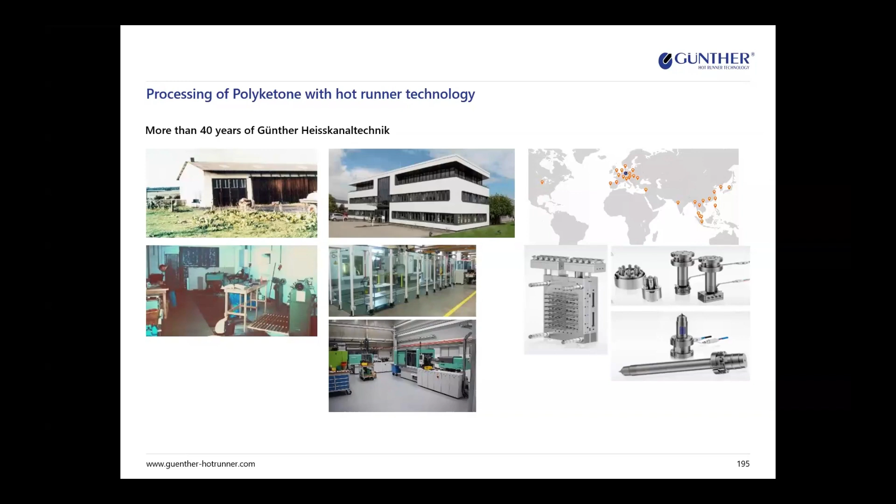As you heard or saw, the polyketone grade was launched in the market in 2015. Now you will find different kinds of grades from distributors like KD Feddersen, or compounders like Akro-Plastic, Ems Chemie, Riamaxx, or LyondellBasell. You saw also the wide range of properties and the good balance of this material.

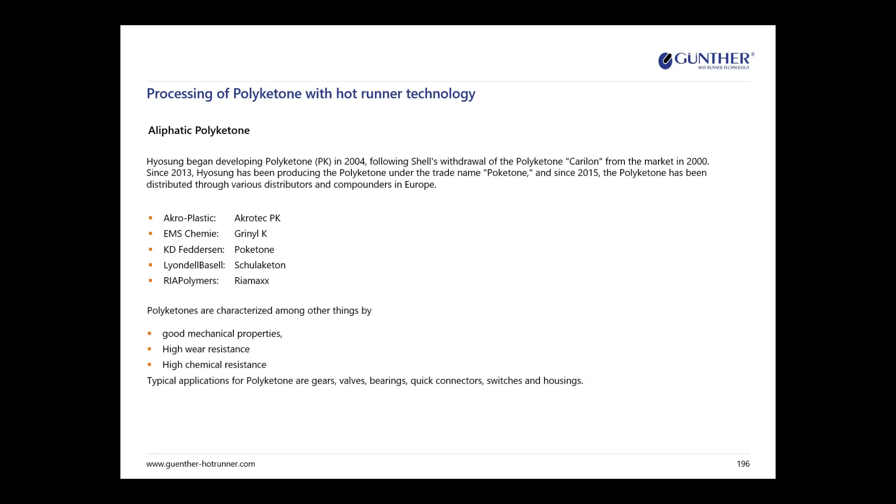For this, we see that more and more customers ask for hot runner systems to process the polyketone grades for their applications.

In the beginning, I remember in 1998 we heard of Shell's Carilon, maybe some of you remember. This was really terrible to process, and Carilon was cancelled after a few years from the market. So we wondered how it would be when Hyosung came again with a polyketone, and we were really surprised how the processing of the material would be. And of course, polyketone could be processed with hot runner systems.

It's quite a challenge, but it's a solvable task if you take care of special issues, as you can see here. The main issue is residence time and temperature. It's a very, very important issue for this material.

You can see here the maximum temperature in the hot runner should be between 240 to 260 degrees Celsius. Our tests showed that the mold temperature does not have so much influence on the possibility of cross-linking or degradation of the material. Also very important is that the injection unit and the hot runner system are really clean.

So when you start with polyketone, everything has to be cleaned so that you have a real metal-blank surface. If there are any residues of nylon or POM inside, you will never have fun with this material. So take care to have everything very, very clean.

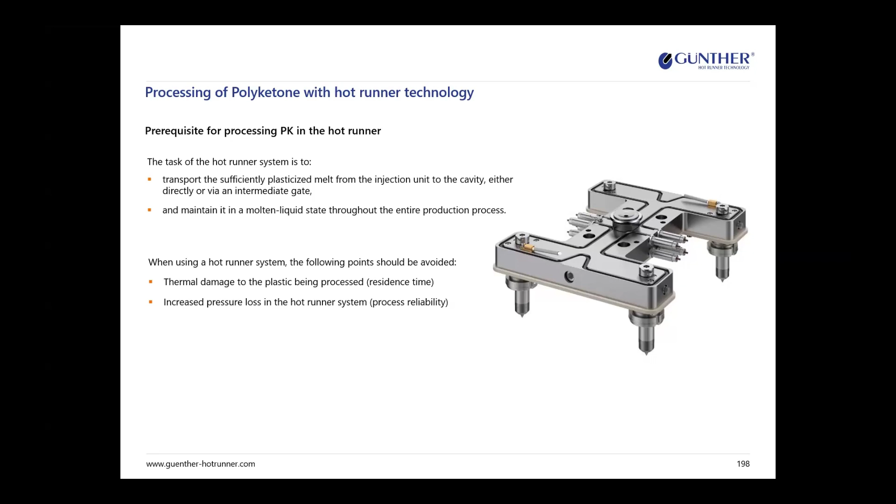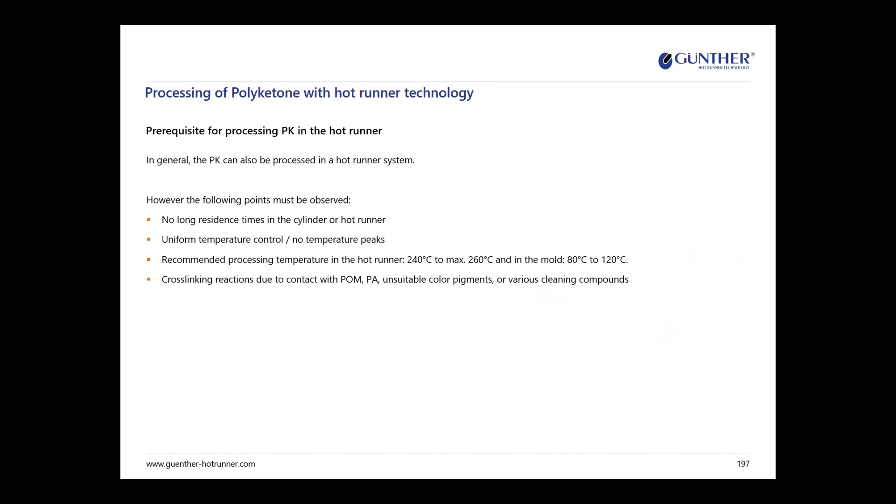One of our customers in Italy came in 2016 and asked if it's possible to process polyketone with a hot runner. With the experience from the former Carilon, we said no, not really, but send us a new material and we'll run tests. We have a laboratory with 4 injection molding machines with different kinds of test molds, so we can carry out a lot of tests with our hot runner system. If you're interested, come to us and we could carry out tests together with you with your polyketone grade to see if the process will be okay or not.

In this case, we carried out the test. You see here one of our test molds with a disc as a sample part. We use a hot runner nozzle with an open tip, and we have a special heating element inside which fulfills a very good, unique temperature profile inside the nozzle. So we have to check how it's processing the temperatures, how the filling study looks, and also what happens after process interruptions of about 5, 10, and 15 minutes.

The results showed, okay, with this polyketone grade it is possible to realize a project to process the material without big problems, but we also have to take care. Residence time more than 15 minutes is really critical due to cross-link behavior and then degradation. It's also very important to purge the barrel as well as the hot runner system with a very high viscosity polyethylene or polypropylene. Please also take care that the viscosity has to be really high, MFI approximately 1 or less at 190 degrees and 2.16 kilogram, otherwise you don't have a good purging effect in the system.

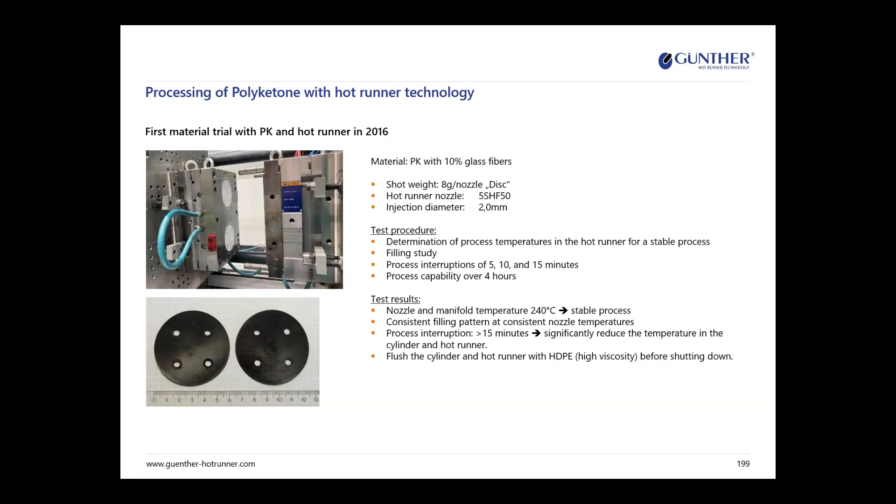This was our first hot runner system, which we realized with a polyketone in 2017. This was a PK grade with 10% glass fibers, 6 grams per nozzle, and we have a 2-drop hot runner system. You see here the nozzle tip. And this mold is always running, as far as I know, till today without any problems.

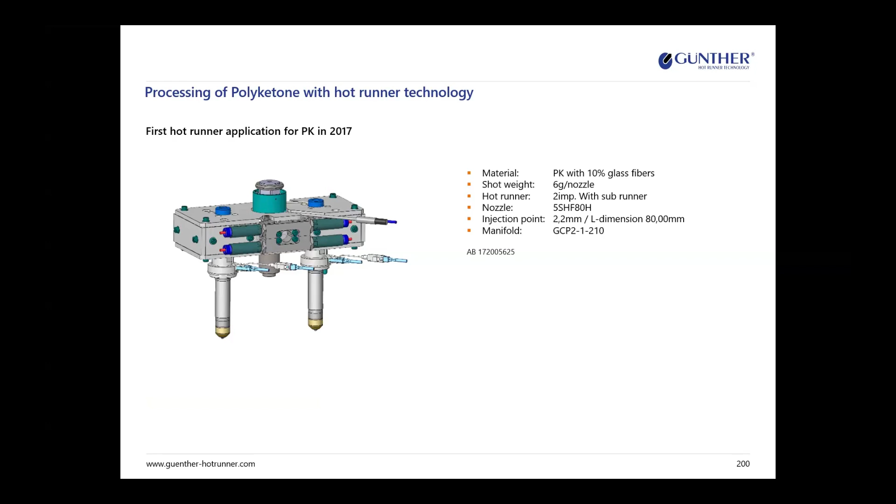What is now special with our hot runner system? As you can see in this picture, we have the hot runner nozzle here, and we have the heating element. This is the so-called blue flow heater, or thick film heater. It's developed by ourselves and we produce the heater also in our house.

Around this heating element there's a material tube. We have here a two-part shaft. This area of the shaft is made of steel. This part here is made of a special titanium alloy with very low heat conductivity. Between the shaft and heating element there is an air gap. You know, air has very good heat insulation behavior. And the contact between the nozzle and the mold is far away from the hot area of the tip.

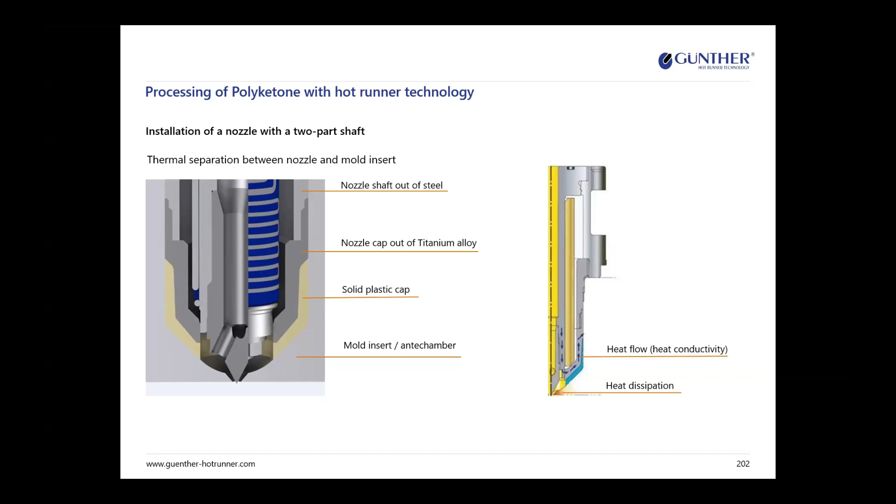This also influences the temperature profile inside the nozzle, and this is one of the most important issues. On the right-hand side, you see a nozzle from one of our competitors. We measured the temperature inside the nozzle. We filled the nozzle with plastic, assembled it in a mold, heated the nozzle up to 300 degrees, mold at 30 degrees, and then measured with a separate thermocouple into the manifold and into the nozzle the temperature inside the plastic. We see this temperature situation inside the nozzle. On the controller you have 300 degrees, but maybe you can imagine what actually happened in the hot runner itself. Here you see we have 50 degrees more. You could imagine with polyketone, such a temperature situation is not recommendable. Maybe with polypropylene it could work, yes, but not with polyketone.

With our nozzle and our friction heating element, we have such a temperature profile. We use the same measurement system, and you see here we are only approximately 10 to 15 degrees more. In this area we have more power to bring enough heat into the area of the tip.

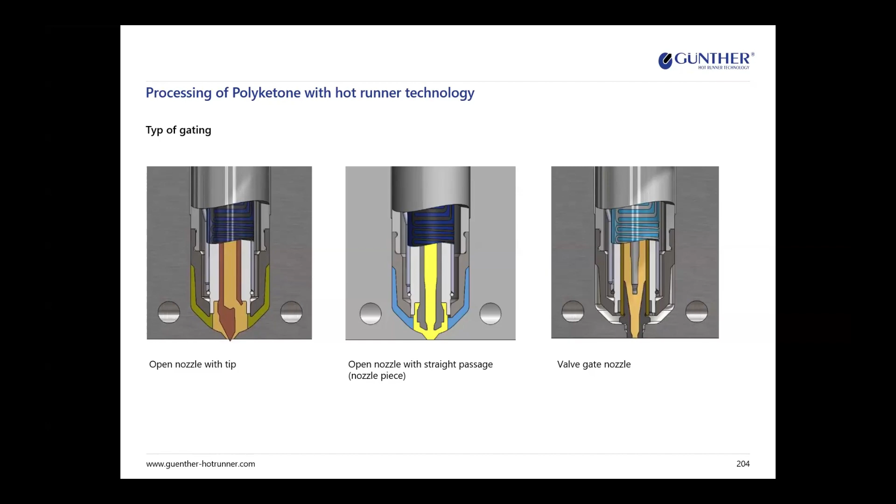It is also important to know regarding the processing of polyketone, as I mentioned before, temperature distribution is very important for polyketone.

We have checked also the manifold. You see here a manifold with 16 nozzles, and before we made a heat simulation, and you can see on the right-hand side the difference between maximum and minimum temperature of the manifold is 3 Kelvin.

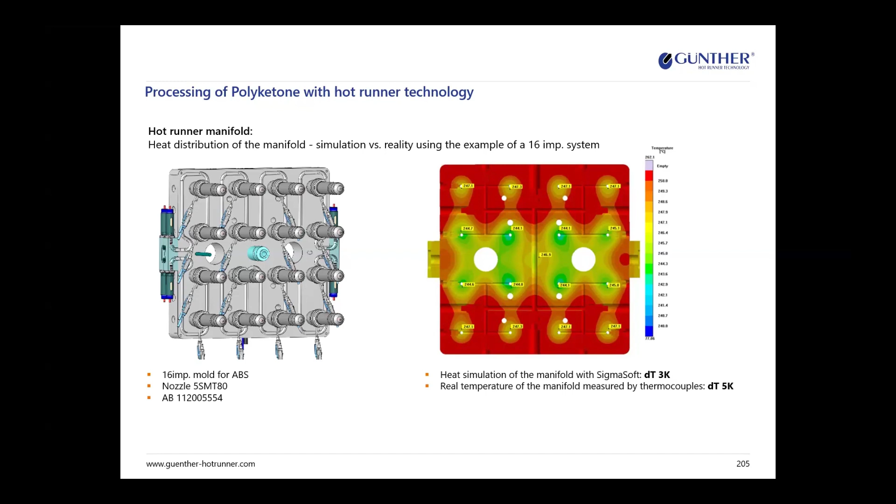We produced this manifold, we added a lot of thermocouples around the manifold to measure the temperature during the process, and the difference in reality is approximately 5 Kelvin. So we have here also a very good heat distribution, a very uniform temperature profile inside the manifold, which is also important for polyketone processing.

In our house, we have a database where we add applications with customers, also the results of our own tests. We have more than 100 data files inside this database for polyketone. So you could see that we have a lot of knowledge and experience with this kind of material.

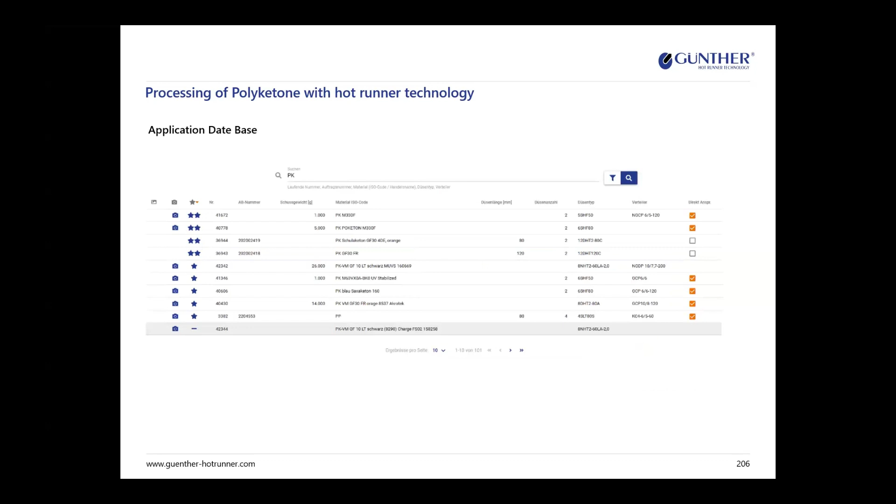Here you see an application which we realized in 2018. This is a polyketone grade with 30% glass fibers and flame retardant, in combination with a very nice orange color, for high voltage connection for e-mobility. Here it's used in the first step, open nozzle with tip.

Here we have the problem that due to the residence time, materials start to cross-link. With the situation we have here with a tip, we have only a small flow gap, so cross-linked material could not purge out. Then you have a blocked gate, and you have to disassemble the complete mold to clean everything, and nobody wants to do this.

This was also a customer who did not understand to use a polyketone with a high viscosity. He said, 'I have a polyethylene in my stock, this is okay.' No, it's not okay. Yeah, he makes experience, that's all.

Then we modified the nozzles to an open tip with one big hole in the middle. Then you have a chance: if you have cross-link, you could purge out the cross-linked solid material, and you don't have the problem of disassembling the complete mold for cleaning.

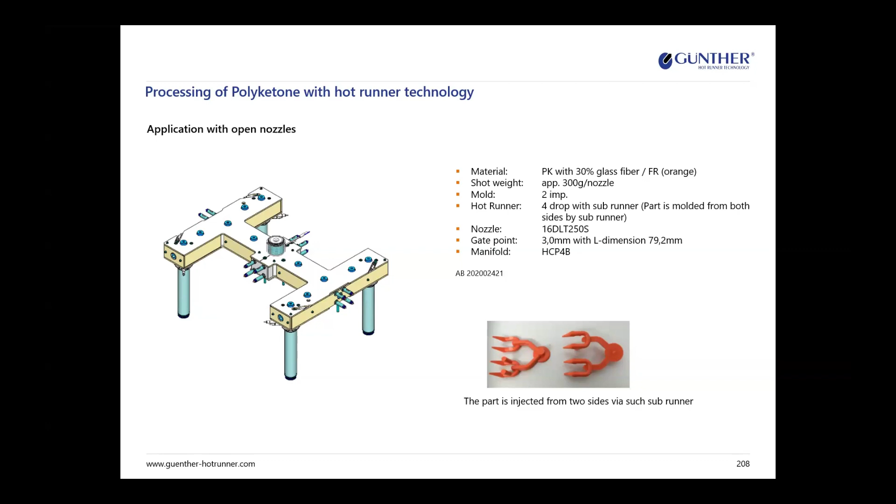We also realized applications with a valve gate system. Here we have a material, polyketone unreinforced, a polyketone grade, in this case 1 gram per nozzle.

Here we have a nozzle - nozzle 6 means the diameter, internal is 6 millimeters. The N means valve gate system. You see here the valve pin inside the hot runner nozzle.

Regarding the design of the hot runner nozzle, it's the same as the open one, also with good heat distribution. But instead of the tip, we have here a separate needle guide, and the needle is pre-guided in this area, then it's closed here at the gate point, directly in this needle guide. So we have the advantage that if the gate point is worn, we only have to change the special mold insert part, not prepare the whole mold insert with welding and grinding and so on.

We have here as a needle drive, single cylinders, so each needle has one cylinder. This is also recommended by Polyketone.

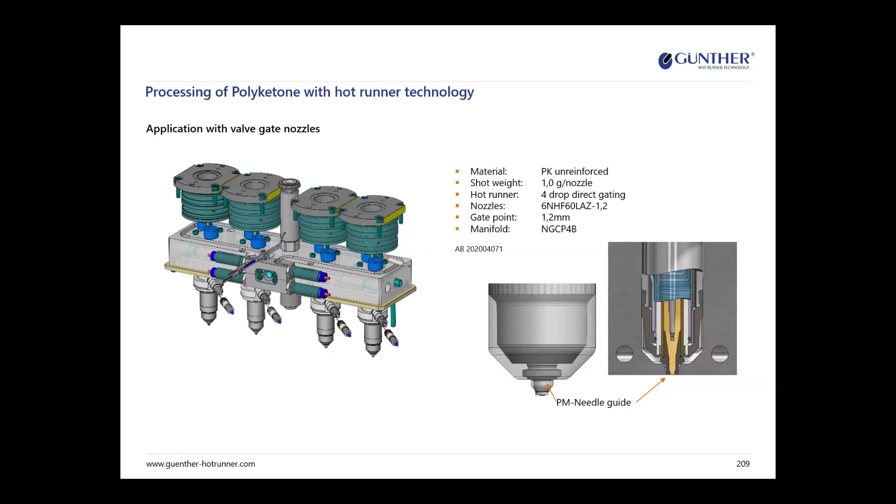If you use needle valve systems, you have to take care that if, for example, one nozzle is blocked, you switch off the other three so you can bring the whole pressure of the machine to the blocked nozzle to purge out the solid or cross-linked material. So it makes sense in a valve gate system to use such single valves for the needle drive. But take care.

For polyketone grades with flame retardant and orange color, we never recommend using the valve gate system. This does not work. One of our customers had such a system with a vertical injection molding machine, and he thought he'd need a valve gate system to avoid material drooling out. He made three shots and then nothing was possible anymore.

Due to the situation that we had only a flow gap over the length of the nozzles, it was not possible to inject the material. We had the cross-link situation, and the customer had to build a new one with an open system, with a straight hole in the middle of the nozzle.

After they modified the mold with this new hot runner system, the process is running, and there's also no problem with material drooling out, even with the vertical injection molding machine. So with this polyketone with glass fibers, flame retardant and orange, you have no problem with drooling out the material. But please keep in mind: no valve gate system for flame retardant orange grades.

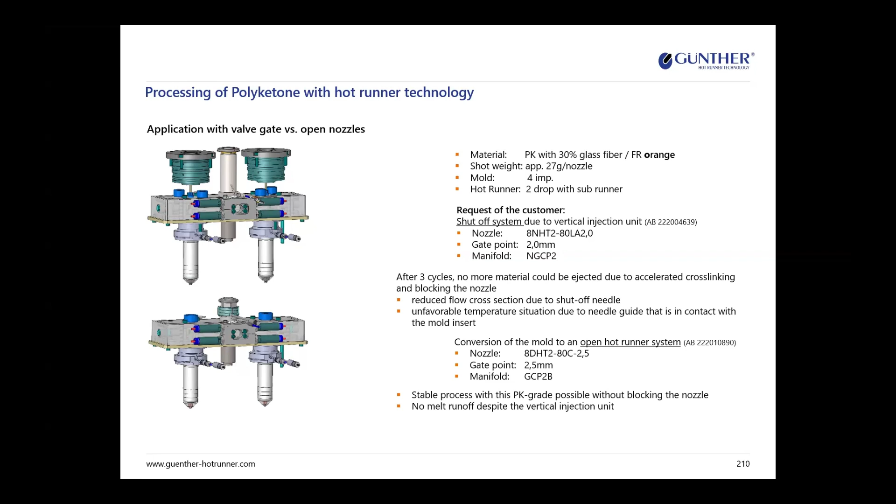As a summary of our experience over approximately 10 years: first, when you have to realize a project, please involve the material supplier as well as the supplier of the injection molding machine. You saw this from Mr. Wiet - Arburg has a lot of experience with processing this kind of material, also Engel. So it makes sense to bring all participants to one table.

Thermal separation is very important, so that the heat stays inside the hot runner and you don't have too much heat loss to the cooled mold. It's very important to have a homogeneous temperature, as you saw, to avoid cross-linking situations inside the hot runner system.

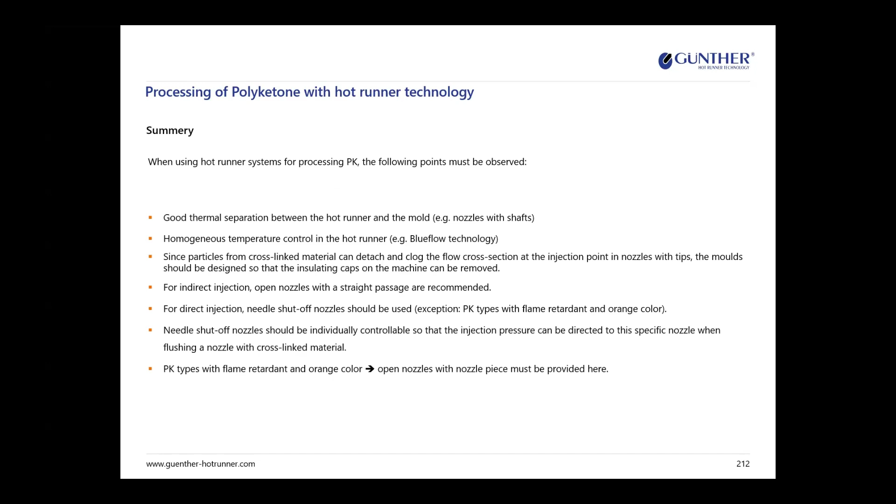In our experience, we could offer 8-impression hot runner systems for unreinforced and glass fiber reinforced polyketone grades. It's also possible for flame retardant polyketone grades to use between 4 and 8 impression hot runner systems, but with flame retardant and color orange, we recommend only 2, maximum 4 hot runner systems. Otherwise it's too critical to balance and work with such a system - you will not be happy with this situation.

We also recommend, if you have an interruption of more than 10 minutes, purge with polyethylene. I know some customers have a special system: if there's a process interruption, the material feed changes from polyketone to polyethylene. Then they have automatically programmed that the unit and also the hot runner is purged with polyethylene, and they don't have any problems. This is really helpful.

Before you switch off the system, purge with polyethylene or polypropylene. Never shut off the hot runner system when polyketone is inside, because you will have big problems cleaning it. With polyketone, you cannot use thermal cleaning.

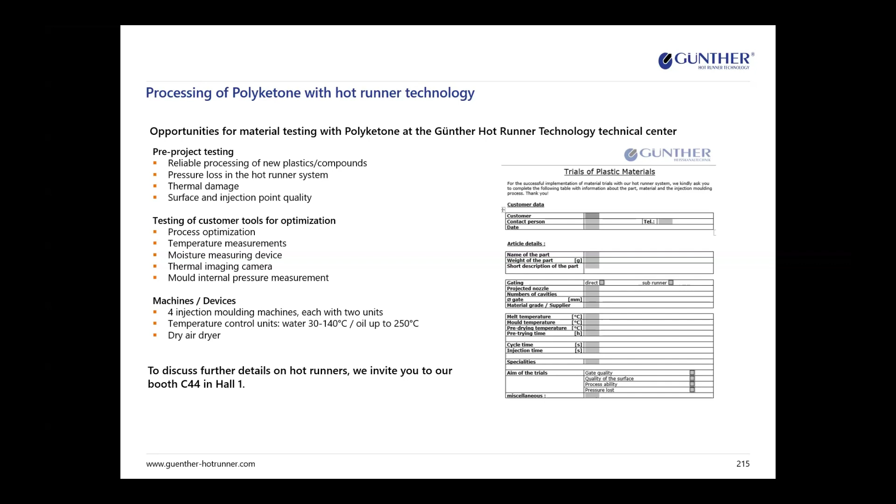Thank you for the great information and technology. Before closing this section, do you have any questions, guys? Actually, I have one, if you can answer it.

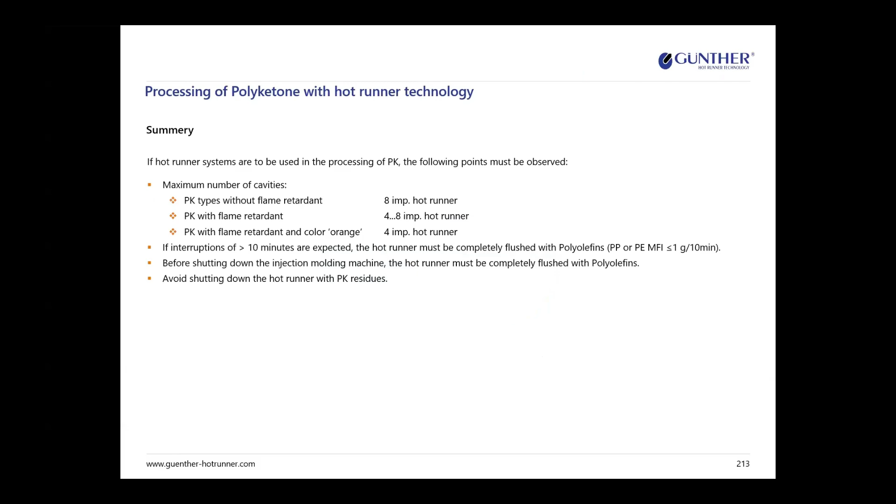Yeah, of course, may I ask a question? I just wrote it down. It's a bit long. I saw that it seems important to maintain the hot runner temperature consistently between 280C and 300C, on the competitor page and yours. This was the comparison of your nozzle and the competitor nozzle, the length of the nozzle.

For us, we defined the temperature profiles at a temperature of 300 degrees, only to compare the temperatures together. This is independent of the processing of polyketone. It's only to show how the temperature situation is inside the nozzle.

Because my question is, yes, we use polypropylene, put it inside, and then we measure the temperature inside the polypropylene. So that's not for polyketone, right? No, this is only to show how the temperature is inside the hot runner nozzle. Polyketone's degradation temperature is of course about 300, yeah, of course. Thank you.

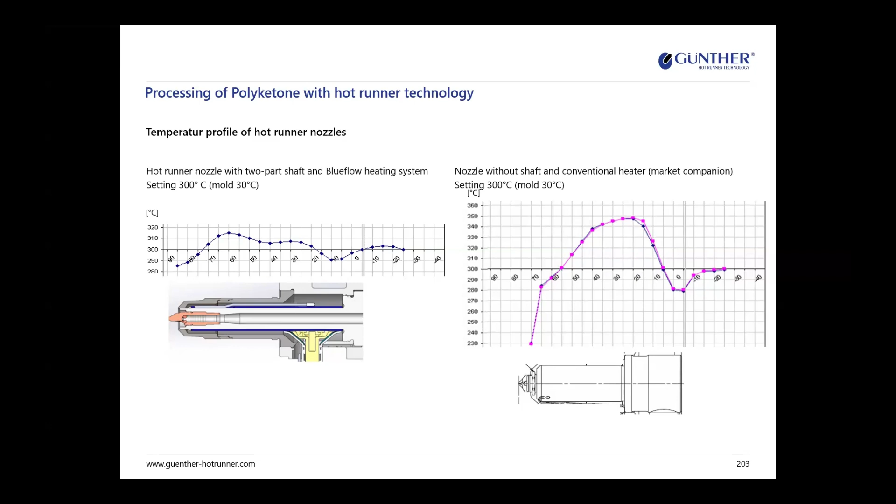We have here the nozzle with the 2-part shaft. If you want to see this, here is also the heating element, different heating elements which we recommend to use for polyketone processing. We also have a flyer, so if you want more information, feel free to take it.

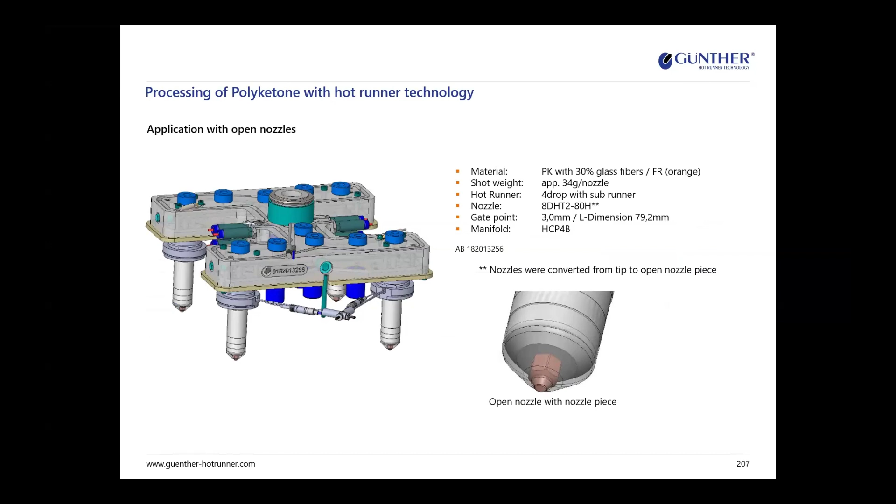Actually, in my opinion, this information is very helpful and great to enlarge the polyketone world, making it larger and bigger. So today our POK seminar is coming to an end. Lastly, does anybody have questions or comments? Any other ideas? Okay, please.

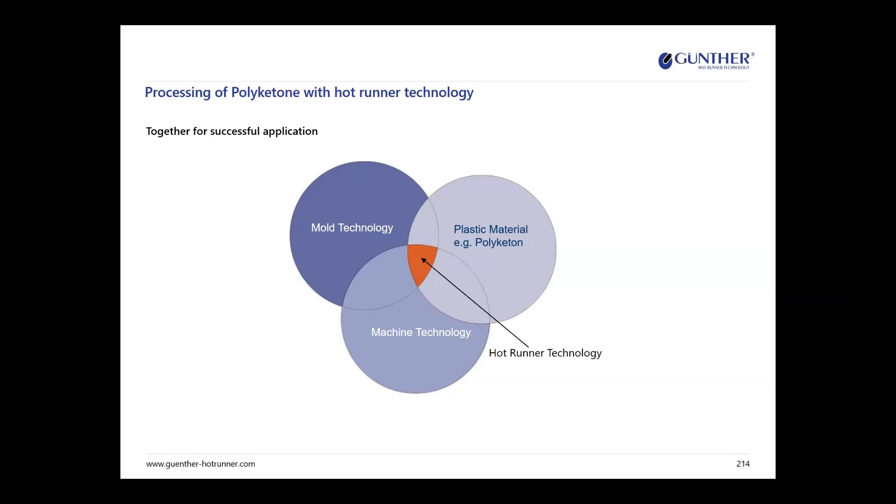At the beginning of the very nice presentation, you showed that the material gets yellow in color when you expose it to heat and moisture. Is that related to degradation, or why is this happening? And are the mechanical properties affected by this yellowness?

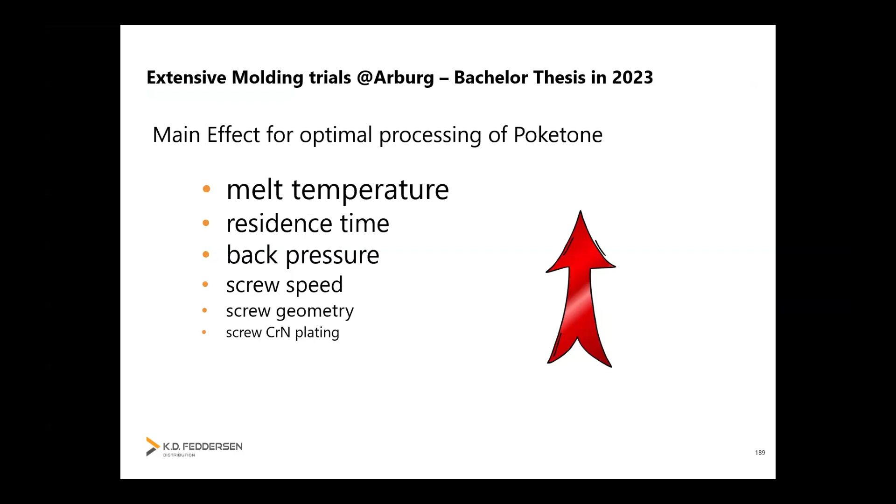The discoloration occurs only on the surface. If you look inside the specimen or part, there is no change. So it means the overall properties are not impacted, and our mechanical strength remains the same.

In some applications, like a fitting in a coffee machine, our part changes to brown. If we measure the discoloration, it's around 40 to 50 micrometers, and inside there is no change. So mechanical performance is maintained.

Thank you very much for the answer. Anybody else? Okay, so maybe Mr. Chen.